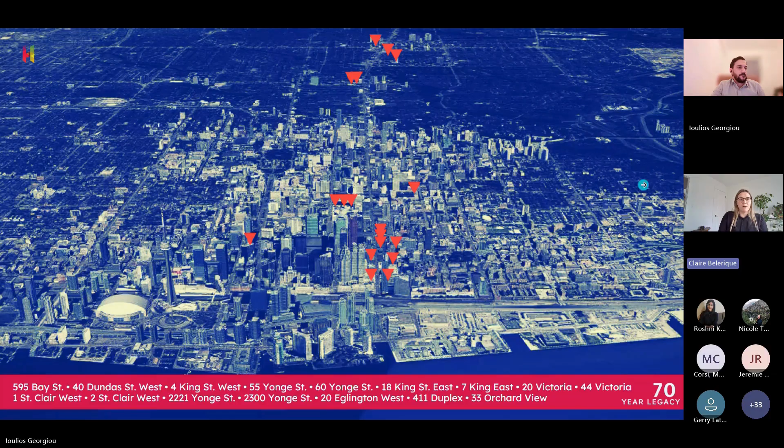So this is a bit of our story in innovation, right? We then got into renewable energy. We developed new renewable energy projects. Ioulios, next slide there.

We developed several addresses here: 1 St. Clair West, and notably 595 Bay Street in Toronto, and 400 University Avenue as well. Many of these buildings are still standing today, if not all of them, except one I believe is being redeveloped to an additional 12 stories on top of that. Specifically on 33 Orchard View and 411 Duplex Ave, we added apartment buildings next to a mall, something that was a newer concept for Toronto, just showing our path in innovation.

And then next, we went into renewable energy after, we like to say, Toronto had a lot of developers around building high rises, and we felt a calling into renewable energy.

So we developed projects from 2008 to 2023 in wind, solar, and water power projects. We owned, operated, and developed a portfolio of $150 million.

And then during the commissioning and the completion of our last project, we really felt a calling to support housing. We found that there was a lot of finger pointing around who is causing the driving costs of housing and why there's such a lag in building.

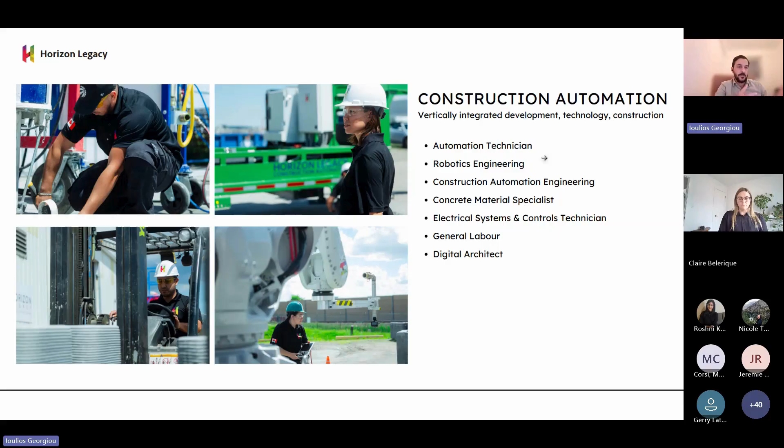And digital architect, as we said before, would be design and coding to have the program that goes to the robot to perform the printing. So in general, it's a small team of multiple disciplines.

So in order for the process to be successful, we're looking at the benefits of printing and why we started and why we keep developing this. So the first one is the labor efficiency. It is a smaller team with multiple disciplines.

There is a labor shortage internationally in construction. And through printing, we are having smaller teams, but we are adding specialized positions in construction, so creating more work while keeping a small amount of general labor in the team itself.

With the work customization, we mean instead of having the same repetitive product to achieve mass production, low cost and efficiency, we can have a product being varied in form through a pattern or slight geometry variation, and having that mass produced in different forms without really having an effect on its cost and time for that customization.

We also are looking at remote communities to bring our equipment there, to hire locally general laborers to bring our skills there.

We also work as a general contractor in these projects. The key to all this is to increase productivity, efficiency, and speed. So we try to make the robot move faster, to make the entire process faster, positioning faster. This is an ongoing process that started 5 years ago and is still ongoing towards the keyword construction automation. It's a step-by-step approach to getting closer to that. Finally, we are looking through the process to have a smaller carbon footprint impact and a smaller impact on the site itself, because we are working with concrete.

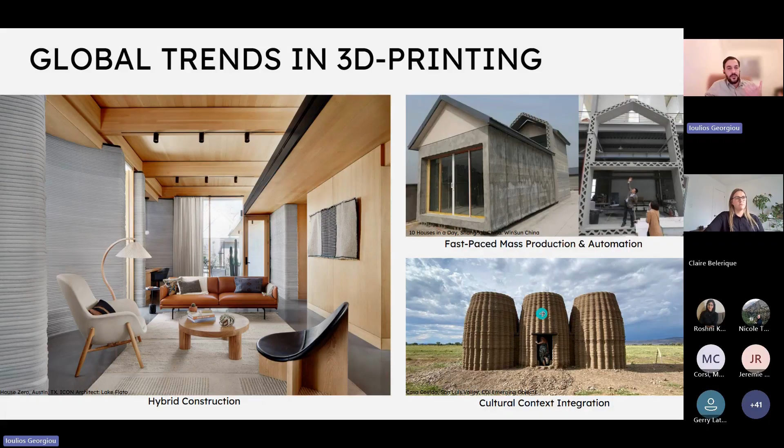We would call it a potential for organic architecture. It's a resurgence of a cultural context as well. So we see this example by Emerging Objects in Colorado.

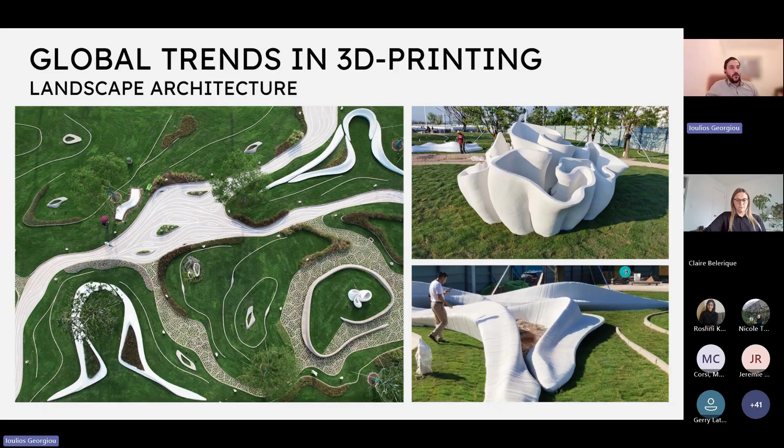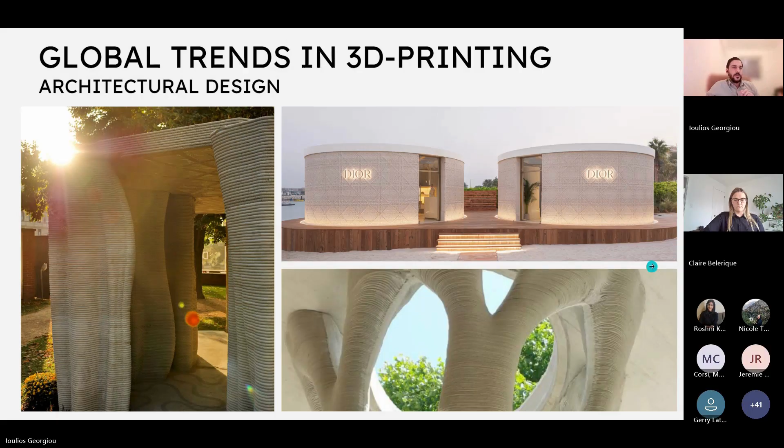Similarly, also in architectural design, there is definitely freedom in geometry. It has its limits, but it's also open to new forms of architectural expression while bringing a rebirth to architectural concepts such as ornamentation, reinterpreting classical components like the column, creating branching geometries through printing, and also using geometric freedom at a smaller scale, as we can see in this Dior pop-up building in Dubai, where the organic form happens at a micro scale on a surface articulation through a pattern. This is done by WASP, the company.

So back to what we do at Horizon. In our lab in Toronto, we are talking about large-scale concrete 3D printing, which means additive manufacturing. Using the robotic system, we extrude material in layers, and these layers have specific parameters. We work between 10 millimeters and 14 millimeters in layer height and 40 to 70 millimeters in width. Our speed of the robot started at 200 millimeters per second and can go up to 500 millimeters per second. It's an ongoing process, being able to print faster and also make it possible.

So the creation of the material happens in the lab. The mix is advanced with each project. The robotic system is built in the lab. Systems are built in the lab. They're also advanced from project to project.

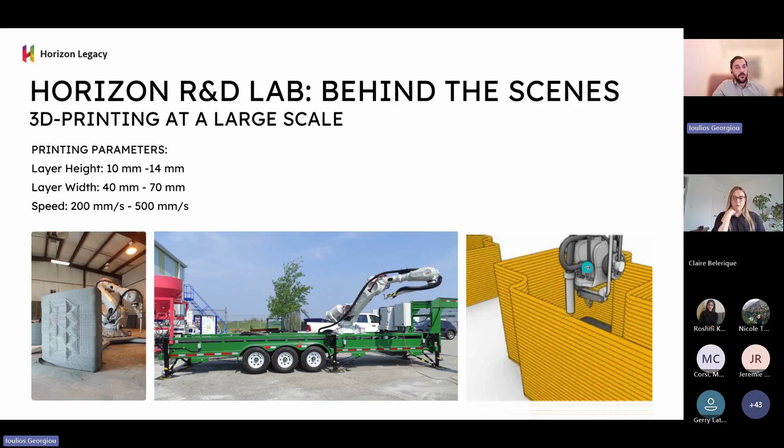So now from a software point of view, we use design computation. We form our geometries through 3D modeling, but also through parametric design. We use for it Grasshopper, which is the visual programming interface of Rhino 3D modeling.

And there we generate the code that is to be printed. The code is then controlled through Robot Studio, if you've worked with robotics before, to locate exact collisions or vibrations caused through the robotic aspect of things. In general, the entire design or optimizing a design for printing happens through this software pipeline.

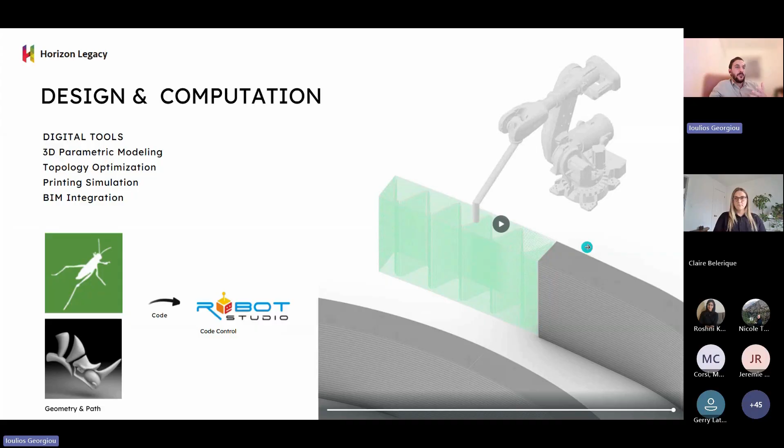We are also looking at integrating this with Revit, a BIM process. We're trying to do this in our next project, hopefully successful, to have a more cohesive design-to-fabrication pipeline. It's another step toward automation that we're trying to achieve. But the main R&D happens in the lab, it's what we actually print, and it's this cohesion of all these parameters.

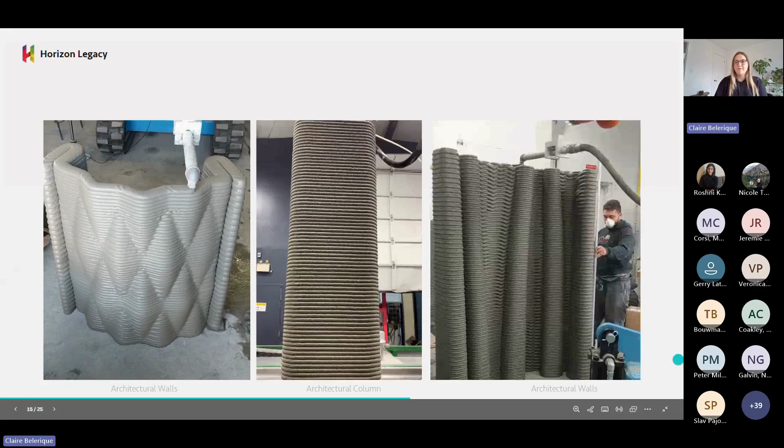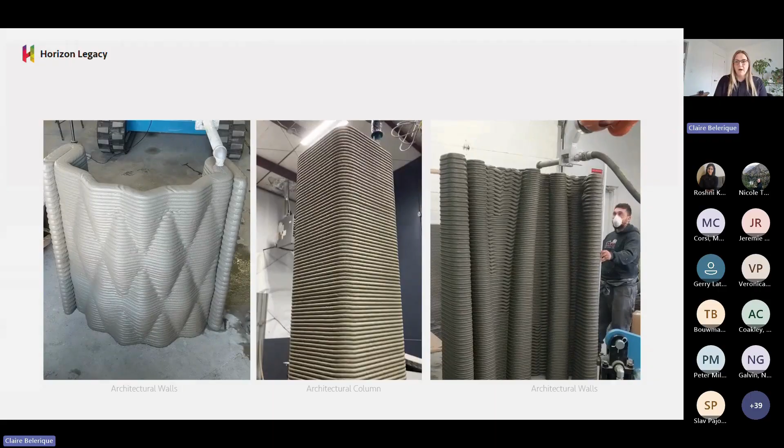So Ioulios was just sharing some examples of 3D concrete printed walls that we've printed in our lab facility. This was crucial for us to test the technology, as well as the mortar mixture we developed in-house, and run it through a series of tests with our engineers and partners to ensure they could perform up to Ontario Building Code.

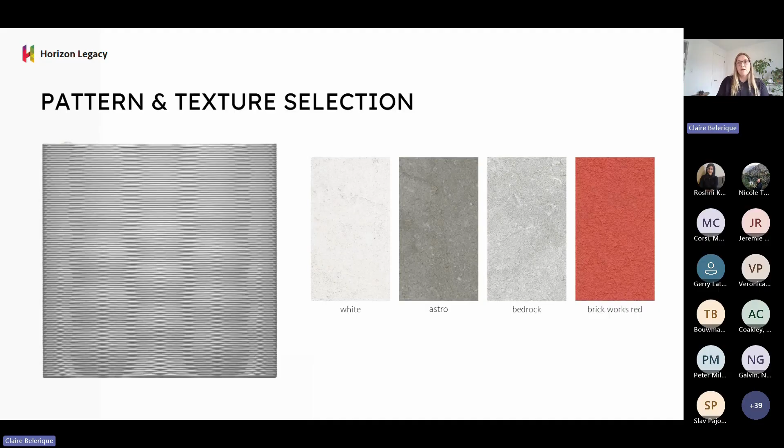Here we're looking at our ability to manipulate the patterns and textures to add different features to the concrete walls that would typically be a lot harder to form with traditional formwork. We've also found it's a lot easier to treat and inject pigment into just the surface of the concrete, which offers opportunities to save costs, because we found that pigment is very expensive to add to concrete.

Ioulios, welcome back. I took over. Sorry about that.

Go ahead. And then here we are to share that this is happening here in Canada in some of our backyards as well. So this is our first project in Gananoque, Ontario. If you're not familiar with Gananoque, it's about 25 minutes east of Kingston. This was an important proof of concept for us.

We invited lots of folks to our project site before we even started construction to understand the feasibilities and the costs. We're excited to share that we are near completion. All folks will be moving into these units at the end of January, and we have built these units at under $300,000 per unit at hard construction costs.

With this in mind, we built 26 rental units, stacked townhome units that are all rentals. We are finding 67% less greenhouse gases consumed over the lifetime of this building. And as I previously mentioned, we have built this up to Ontario Building Code.

The specific 3D concrete printed walls are not load bearing. There is a traditional stick frame build on the interior walls, and this was required to meet fire safety and Ontario Building Code for the actual strength of the walls. It was our first project, and we wanted to ensure we were going to be successful in delivering this test.

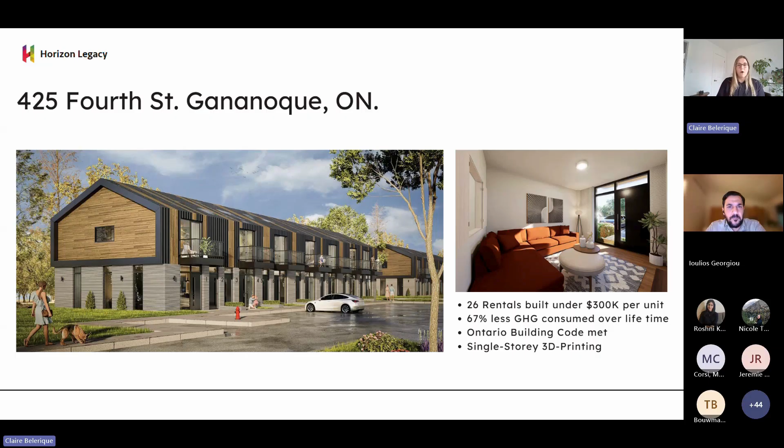So the single story is built with 3D concrete printing, and we've added additional levels of automation throughout our process with our next project, which Ioulios will share more about. But going back to Gananoque, Ioulios, you got to intimately know this construction site during your time on site developing the project, so please share more about your process and experience working with robots in construction. Thank you, Claire.

Yeah, it was definitely a challenge, the first building. So we used the VAL 2.0, as shown before. The print was only one story. We have to say it was a non-structural ground floor, and we printed the exterior walls of this building specifically.

So it was a small team printing. At the same time, of course, there was stuff done in the conventional way, so we had to pour slab on grade, for example. In our other parallel work done next to printing, we did quality control with each print.

So the team was measuring humidity and temperature, getting samples of the walls to be tested, and checking for potential displacements of the material, because again, it's a dripping material, it's concrete. So all this is also part of the process. It's a dirty process as well.

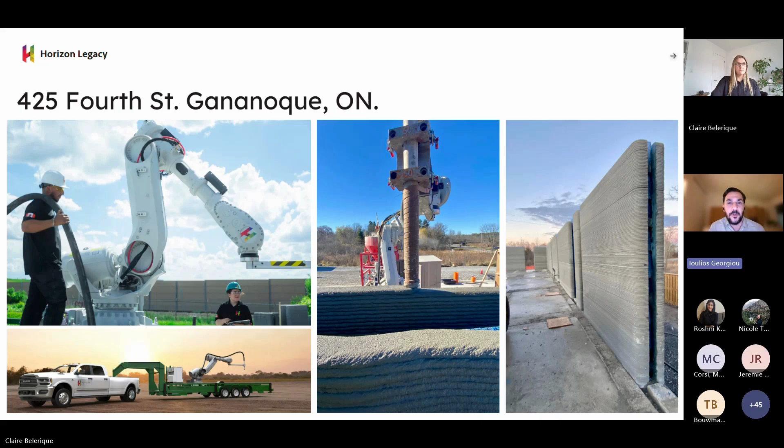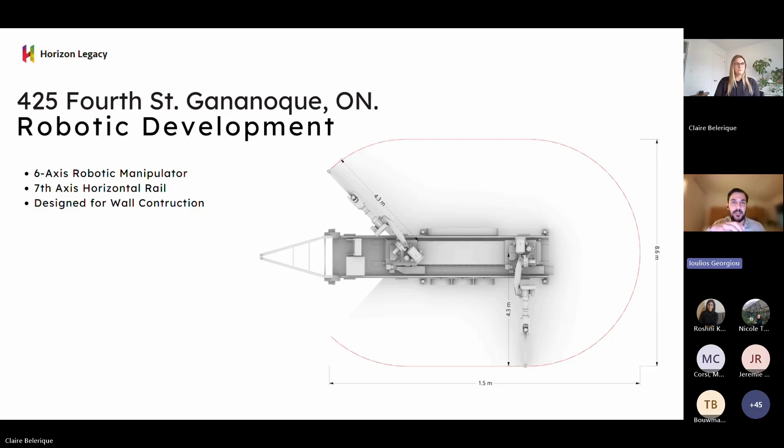So the VAL 2.0 was developed specifically to build walls like this. It's a 7-axis robotic manipulator. In principle, the robot has 6 axes of rotation, and added to that is the 7th axis, which is a horizontal rail the robot sits on, making it able to print longer walls.

So the process itself, usually the VAL moves from position to position to print. What happens is we load a code. First, we do a dry run without printing, so the robot just moves, checking for potential collisions that may happen on site, making sure that's in place. Then the robot is calibrated.

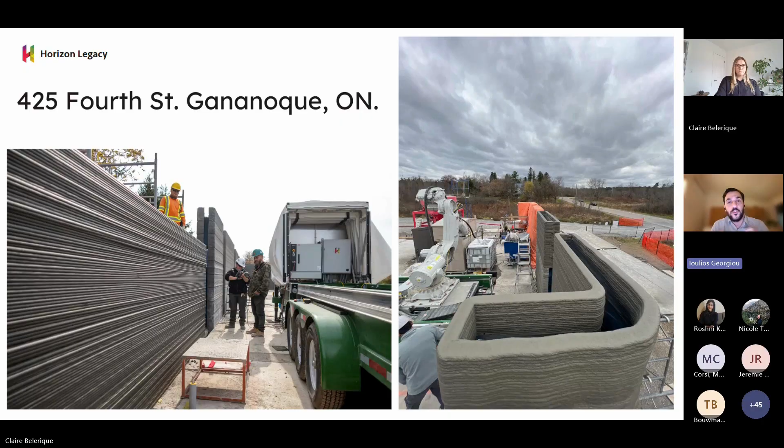When all is ready and in place, the print can happen. You can see here that we applied a pattern on the exterior side of the wall, and on the interior side it's straight, for functional reasons, to have a functional home. You may also notice cuts that were done in the wall. The material wasn't cured enough, so we were able to perform manual cuts. These were essential for connections to windows and doors using wooden frames, and also to have thermal breaks.

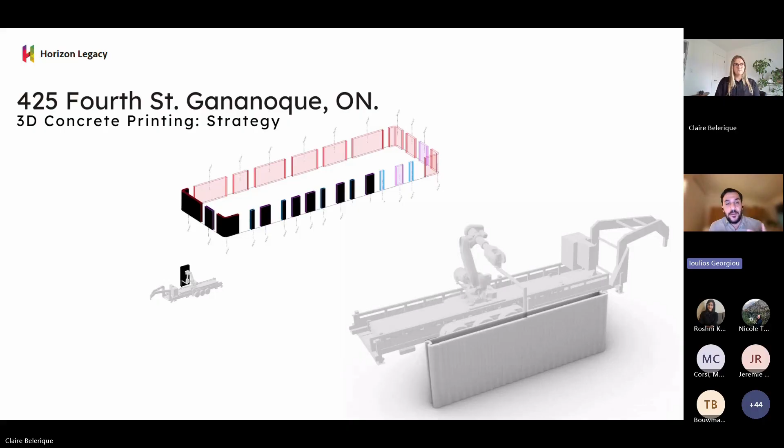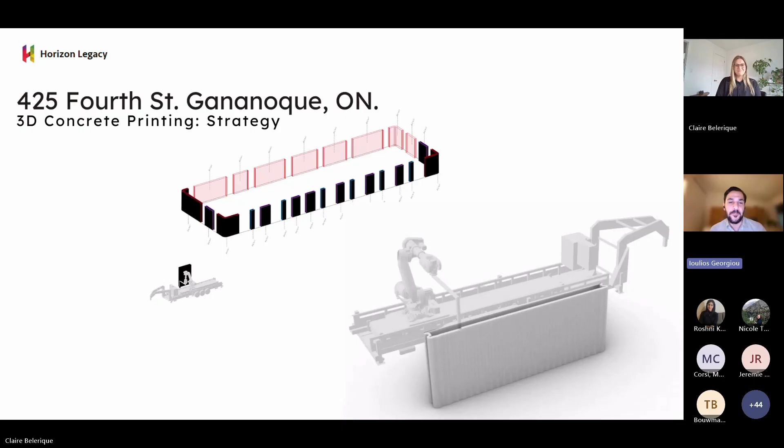In any case, before we went on site, we had to develop a strategy of printing, which is always part of the process: how to make as few printing positions as possible. So positioning and calibrating as few times as possible, and having a sequence of what print comes after the other. For this one it's pretty straightforward, but as the next project became more complicated, the sequencing can become sort of a puzzle at times. So this was all simulated beforehand.

We were able through this process to also calculate how much material needs to be ordered, and be prepared for when we go to site.

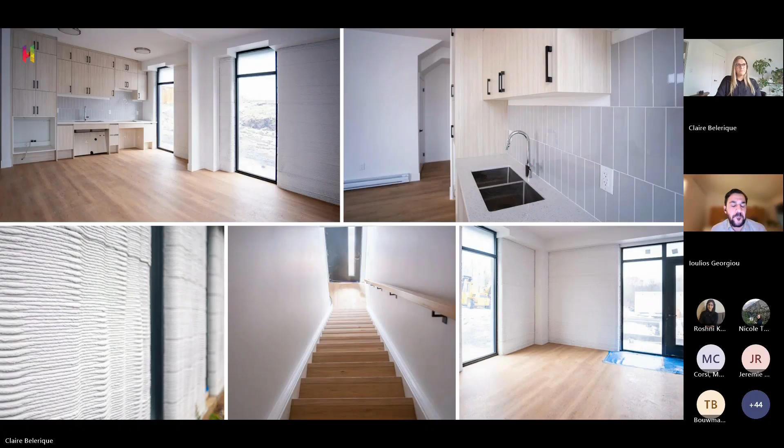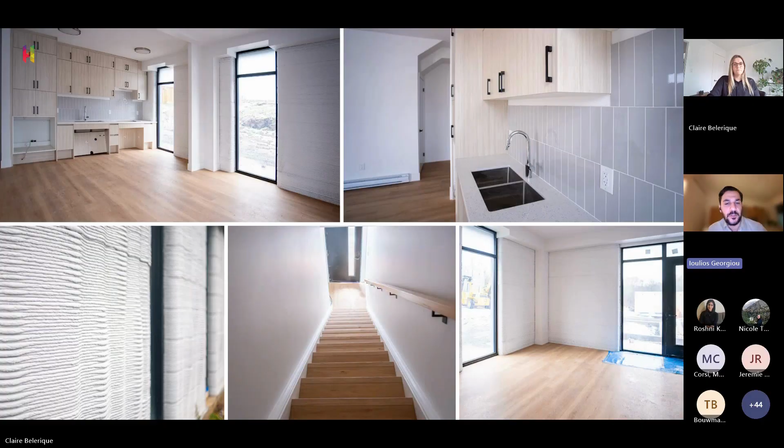As Claire mentioned, these pictures were taken a couple of weeks ago. It's coming to completion. We can see a bit of the pattern in the lower left picture. Of course, there's some post-processing with the color on the wall. And we see its integration with vinyl flooring in the same room, some of the cabinetry, some of the finishing for the kitchen. This is how it's beginning to look.

At the same time, our second residential building has started construction. We are currently at the ground floor. This is the project called Anidase, currently being built in Six Nations, Ontario, on Indigenous land, in collaboration with Two Row Architect, an Indigenous architectural firm. For this one, we are doing three stories of 3D printing, and it is structural and load-bearing 3D printed walls that we are using.

In this one, it's not only load-bearing, but we're not only printing the exterior walls this time, it's also demising interior walls. So the main skeleton of the building is done through concrete 3D printing. This required the entire R&D development to reach this next stage.

So it was a new robotic system, a new material composition, making things faster and more efficient, with a lot of material testing and structural testing to make sure our walls perform structurally as intended. This was a very close collaboration with testing facilities and also the structural engineer and architect to design new walls to make it possible.

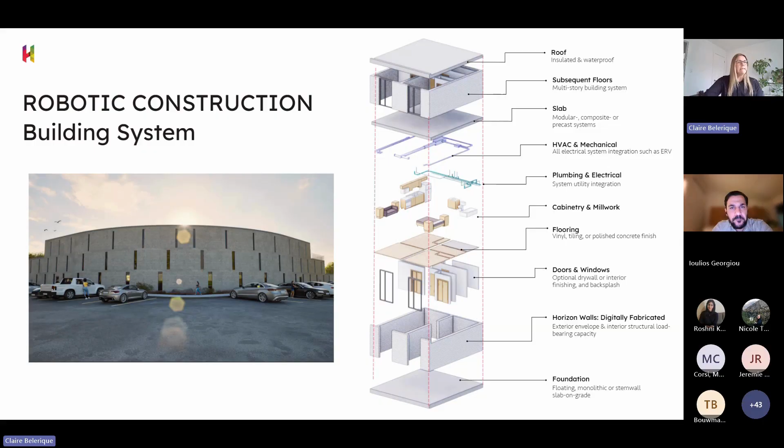It's important to address that we're not the only ones doing this. When we started this adventure back in 2020, there were only a handful of companies globally looking into 3D concrete printing. Now there's projects going up every single day. We're so happy to contribute to the success here in Canada in bringing construction innovation to the front line, celebrating this change along with others in the industry we've found across the country.

Lots of change is required at all levels of government in embracing new technologies. I found this quote: the pace of innovation is accelerating, and the cost of standing still is higher than ever. We need more housing globally, and here in Canada more than ever. So anything we can do to contribute that drop in the bucket, to create a ripple effect allowing others to embrace innovation, is something we strive for.